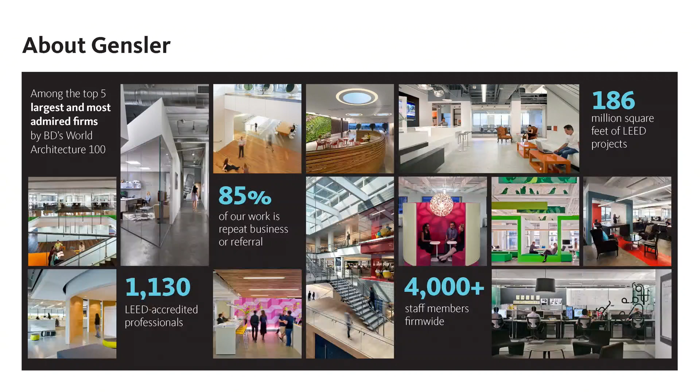But we are a large firm. We're located in a number of different cities, and we focus the work around what we call our three basic markets or sectors, and they include practice areas, which are client types. And why these are important is that they are very specific to the way that you may think of as students your programs. We were talking in one of the studios earlier about doing a retail project and a housing project, and what would it be to have a hotel, where at Gensler we actually have people that are focusing, and these are people who have built a very long career building expertise around a topic. And they add to the mix on projects to lend that credibility to not only our teams, but to the design ideas that go into them.

We're 100% employee-owned, so what it means is that everyone has a stake in the ideas that come out of the office and out of the firm. And I think this is important because it also goes back in terms of the way that we build our teams, which is very flat and very non-hierarchical, especially in LA. We are now working in 86 countries. Actually this number is incorrect because we just crested 4,000 people worldwide in the last few weeks. And we now have 46 offices worldwide.

And the reason this is important is that this allows us to do work at a totally different scale than most people can imagine. And most recently, what it's allowed us to do is to focus on this project in Shanghai. For those of you who don't know, we're working on the second tallest building in the world, which is the Shanghai Tower. If you read ArchDaily, Dezeen, Gizmodo, Engadget, any of these websites, you know that there were these two crazy Russian kids who basically climbed to the very top of this tower, hung out for a day. Yes, that was Gensler's Shanghai Tower. The way we've approached this project is that we have pulled in expertise from each of these offices worldwide and looked at the design from a number of different ways, and I wanted to share a little bit about that.

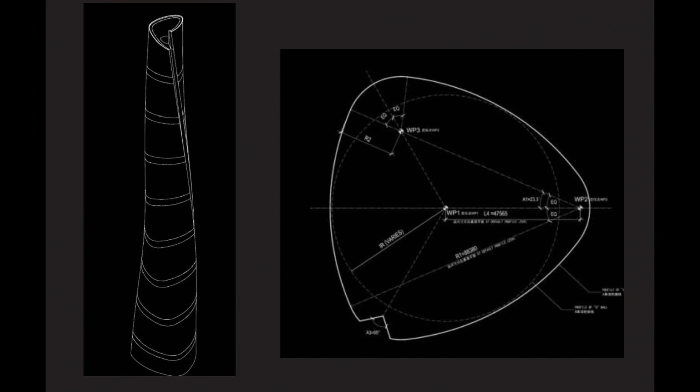So for those of you who have been to Shanghai, this is in the Pudong district. The tower is just over 600 meters tall, 632. It's a hybridized building program-wise, which is retail, office, hotel, apartment, and it will contain the highest public observation deck, unlike the Burj, in any building constructed. The way that we've gone about it is to look at it from a scripting and formal standpoint to optimize the structure around sculptural form. So what it is, let's see if I can get the, there we go. So what you get is this sort of guitar pick-like shape. As it rises vertically, it both twists and it tapers. The way that that is managed is it's done through a Grasshopper script. This is the script that builds both the form and the panelization that we ultimately exported into Revit, which I'll talk a little bit about, technically speaking, how we move from one piece of software to the next.

That form is then optimized through simulation. So what you see are varying differences of the amount of twisting that goes on. After we do that, we also talk about the amount of tapering that happens. Each one of these subtle variations allows us to remove structural steel out of the total equation because the biggest load on supertalls is wind load. So the more we can make it aerodynamic and the more that we can allow it to basically act as a fin and a blade inside of the air tunnels, the more steel we can pull out of it. Less steel, less cost, and ultimately more likely to get built.

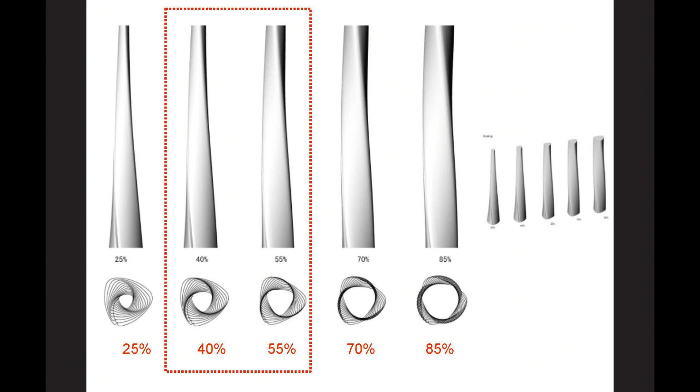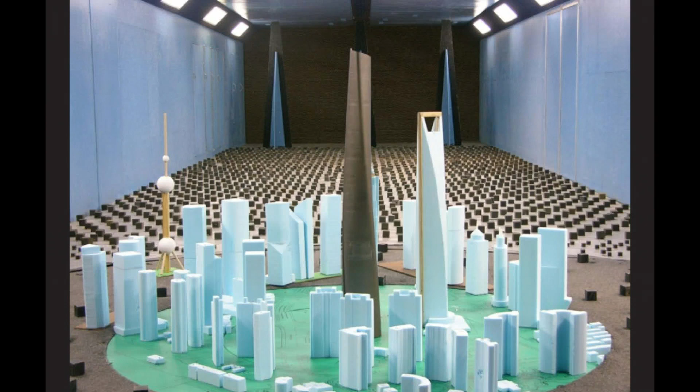So here are the wind tunnel tests. These are actually simulations. We also do them physically so that we're coming back and forth from the simulations, modifying the model. Those models then get produced into a wind tunnel. That tower that's there in the middle, which is our tower here, is about a 20-foot tall model. You can see all the wind points that are out on the perimeter. So this is really leveraging global expertise. There's people from Los Angeles, San Francisco, New York, London, and Shanghai, all working on this tower through the early parts of design. As we went into documentation, a team coalesced in Shanghai, worked on the documentation, and is still working on the documentation as we wrap up the exterior enclosure and work through CA.

This is the final wind tunnel test. This verifies ultimately that the form is right, but I think you get a sense of the overall scale of some of the models. The panelization: we use a lot of scripting in our studio and across the firm as a whole. What you see on the right is a first pass at panelization to make that shape.

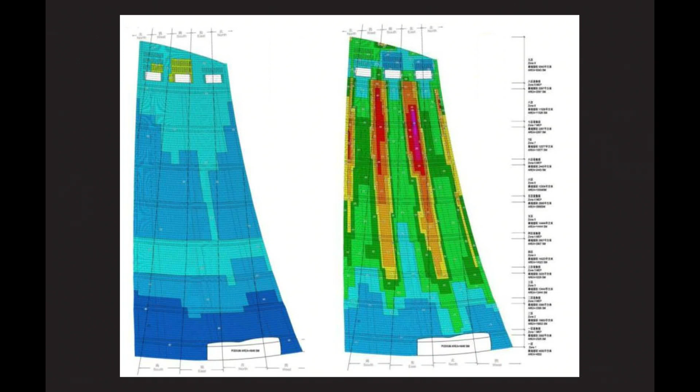What you see on the left is an optimized version, which basically allows you to take the triangulated shape or the trapezoidal shape and unitize it so that you can get a standardized shape across the entire surface. This is all done through Rhino and then exported out to Excel to verify compliance. And then it's exported into Revit. And we document ultimately everything inside of Revit.

When I was here, I actually drew stuff by hand for part of the time and drew part of it in AutoCAD. But we primarily model early on in Rhino and then document everything in Revit, and there's a really clear symbiotic relationship between the two, which I'll get into in a little bit more detail.

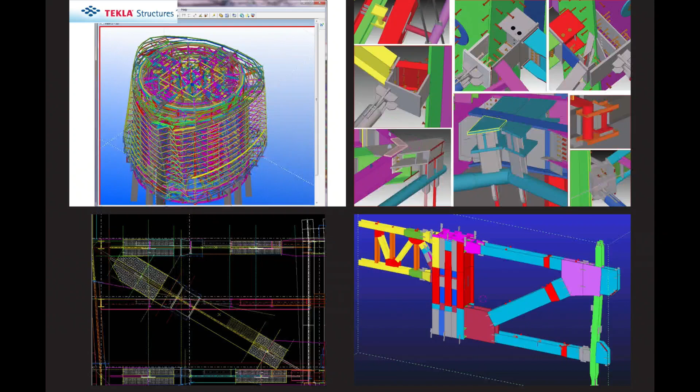We also coordinate that with our consultants, so you'll see full 3D modeling inside of the tower and inside of the projects, so they're fully coordinated models. And then we do that with structural steel as well. And the reason that the steel is so important is that in a super tall, the members are extraordinarily large, as you might imagine. So big that they need to actually be coordinated in terms of being able to be driven down the road. So you'll see the part on the left here is then put into place, and you can see that's a person right there. That's a beam.

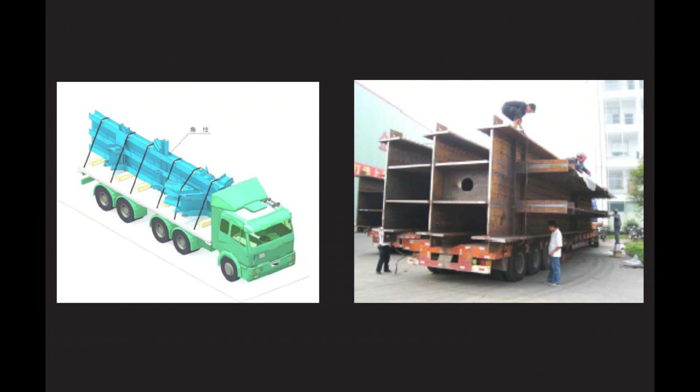And these are simulated. Again, simulations are run from the steel yard all the way to the job site, and they use our models to coordinate that activity. Just a little bit more in terms of the logistics. The way that ultimately the contractor won this project, I think, is really interesting. They were able to take our model out of Rhino and ultimately run simulation on it for tower cranes.

For any of you who have ever seen a tall tower go up, there's ultimately a crane at the very top that picks everything, pulls it up to the top, and keeps going. They won because they had figured out how they could ultimately get 4 tower cranes on top of the tower. All 3 losing teams could only get 3.

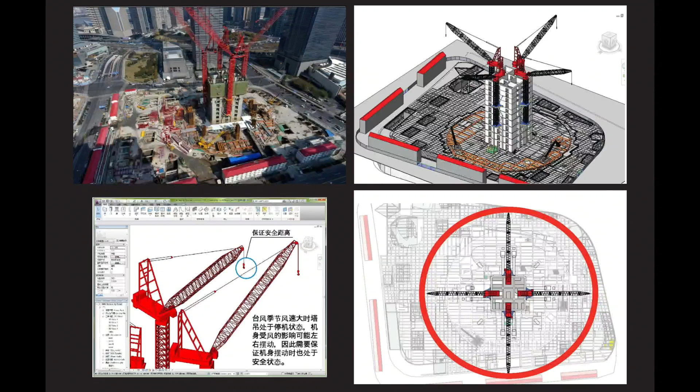And then we take that same piece and we work through SolidWorks, and in this case, Inventor with the subcontractor to go through mullion and extrusion fabrication, and then these are the shop panels that occur. And this is it under construction, and this is just a little old. We actually have a bit of an issue sometimes getting updated images out of China. I sometimes find images more quickly on Flickr than I do within our own office.

But we're structurally all the way to the top, which is here. When the building's completed, it'll be the world's largest double-skin facade. Each one of these waistbands is effectively a mechanical core that supports a stack of a building here. In the event that there's a fire, people are able to egress down to these. It's part of the Chinese building code.

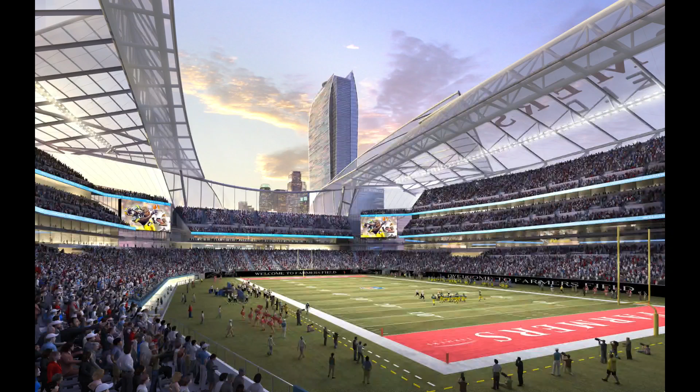This is probably no more evident than the work that we've been doing on the Farmers Field. This is a new NFL stadium in Los Angeles. We don't have an NFL team yet, but I know that it's coming soon, hopefully. But I want to just talk a little bit about the way that this roof is made. So this is Farmers Field. It's a pretty simple structural problem.

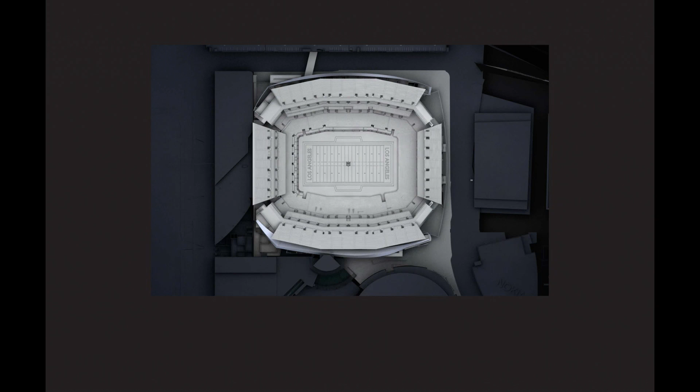Basically, there's no columns anywhere over the field, so you have these two long spans on either side. They need to ultimately bridge from end to end. There's also the piece that goes at the very edge of the bowl, which is the green piece. At the end of the day, those are two very long super trusses. Those super trusses then have a fabric piece that comes across and a piece that runs along Chick Hearn Drive.

We saw this changing over and over as we were reconfiguring the bowl design, and so the amount of structural steel that was in this, again, needed to be optimized. So we ended up writing another script for this. This script ultimately controls the structural language of just the frame, the superstructure of the lid for the stadium. And what it generates is ultimately this right here.

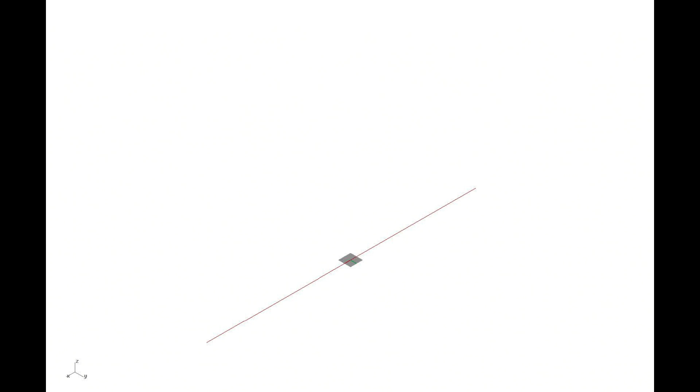And I say that because while it goes so fast when you just run it through the slides like that, it never goes that fast when it's like, I need to move this column out 3 feet. What's the implication of all of that? And so without scripting and without being able to make those larger changes, I think we would be in a totally different state, but we're able to now do that in a fairly aggressive way and then export that material back out into Revit. So it generates geometry. Those geometries are used for renderings, and this shows you a final image of the way that kind of structural piece works.

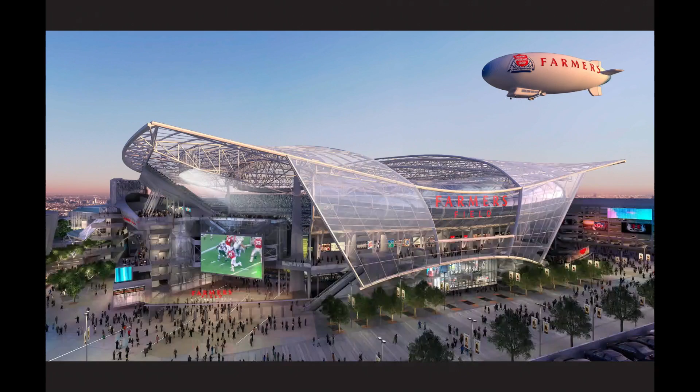I'm going to go a little bit different scale. So this is going all the way down to a memorial that we worked on for LAPD. This also talks a little bit about our own process in terms of the way that we approach the design process as a whole. So this is the new LAPD headquarters. On the other side is Thom Mayne's Caltrans building. Our memorial is right here.

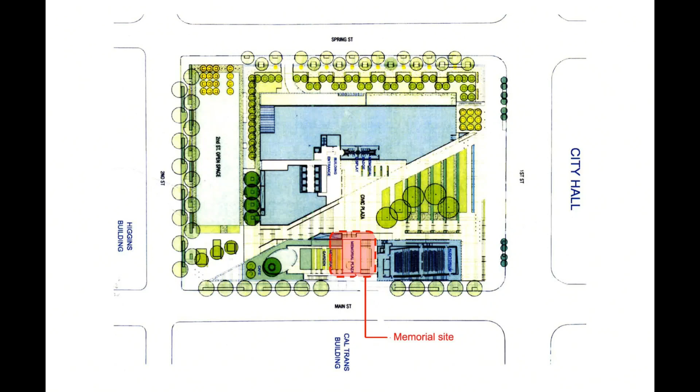We opened this up to the studio as a whole. I mentioned this idea about best idea wins. It's really getting all the ideas out and expressed, taking those, assembling them into big buckets. So in this case, there's 4 different major themes. Teams coalesce around different ideas, and then understanding what the actual program and site condition is.

So in this case, this is a very public space. This is a very private space. The LAPD had very significant concerns that there were no points where people could hide behind this thing, and it needed to be an evolving piece, something that would represent and be a living document of the service that the LAPD offers the community.

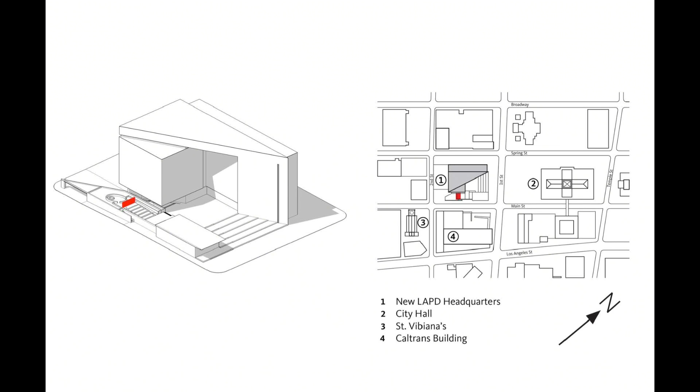So the condition here is that the garden is the privatized space, the memorial is the public one, and there's this demarcation piece that really divides the 2 pieces. You can see Thom's project on the left here, and the landscape piece, which was already in place before we started.

We just knew that this was our site. The approach that we took was this idea about kind of memorial typologies that had changed over time, the notion of stacking, and then the idea that brass has a very important relationship in terms of the police force in almost any community, and what the nameplate represents in terms of the identity of a fallen officer.

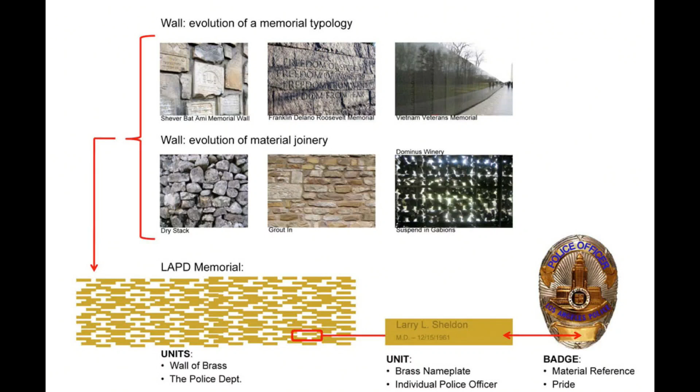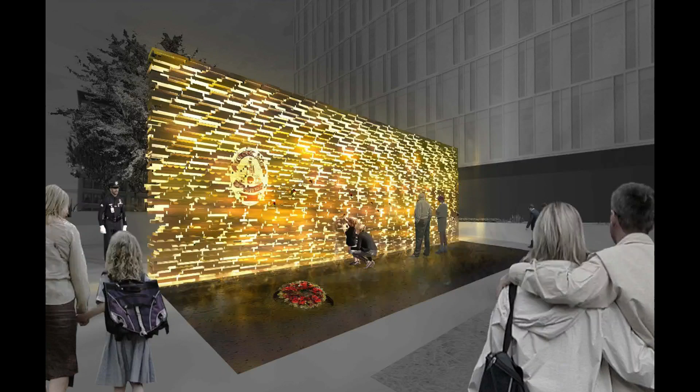This was the concept model that we showed to LAPD, a lot of physical models. This is very simple, but the notion of brass very much resonated with them. This was the concept image that we proposed. Each one of the plates is, again, scripted and managed so that we're able to ultimately not only water jet cut portions of the logo, but we're also able to put names in.

We worked with Zahner on this. We exported our Rhino model directly to them for fabrication. This is a really cool story being in the Midwest and telling this because they actually fabricated in Kansas City, put the whole thing together in one piece, took their picture with it. Then the Kansas City Police Department gave it an escort all the way to the state line.

And then when it was received in LA County, the LAPD did the same, received it, brought it all the way into site, picked it, and hung it as one big object into place all at one time. It really, for me, underscores the scale difference that we're dealing with in the studio, which is that we are jumping from very large scale, very big, complex problems in buildings to a very small object, memorial type resolution. And that kind of scale jump, I think, is what keeps things exciting.

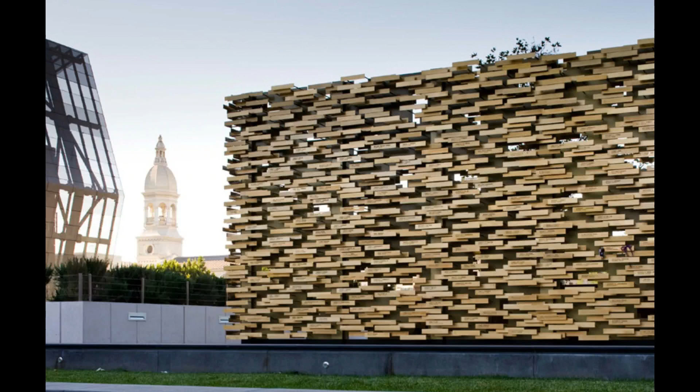So the next project I want to talk about is actually an academic partnership. Myself and one of my colleagues do a number of these academic partnerships, in this case with Cal Poly San Luis Obispo, both around material and also city and urban issues. In this case, it's the material studio. So right before we were moving in, we took on this idea of having a communal table in our office. I had 3 students from the digital fabrication lab at Cal Poly San Luis Obispo selected for this studio.

We gave them a program that we just needed to basically have something that we could put printed material out on, be able to have it as a receiving table for people who came, and then we were going to be using solid surfacing material. So these are the 3 students. These are their 3 individual ideas. What we did is we took each one of their ideas and reviewed them via GoToMeeting. So this is a completely virtualized studio.

They were in Cal Poly San Luis Obispo. I was in Los Angeles. I brought on a senior designer, and we would give them basically desk reviews via GoToMeeting twice a week. For their mid-review, they ultimately sent us a 3DM file. We took that, ran it through our 3D printer, and on the fly basically had their 3D print on GoToMeeting video and reviewed their design while they were in San Luis Obispo.

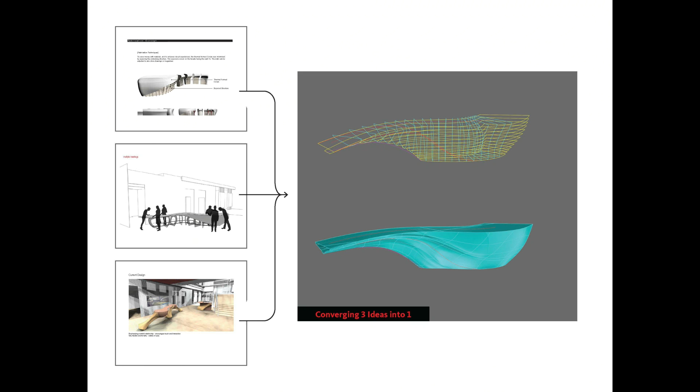For us, as a global practice, that's a very familiar and common thing. For them as students, I think it was a pretty extraordinary thing because they were not used to presenting off a GoToMeeting. But we ultimately took their 3 ideas, combined them into one, worked with Buro Happold, who we have a really great relationship with, and Greg Otto, who is involved there and who is also an undergrad K-State graduate, helped us work on the structural underpinnings for this.

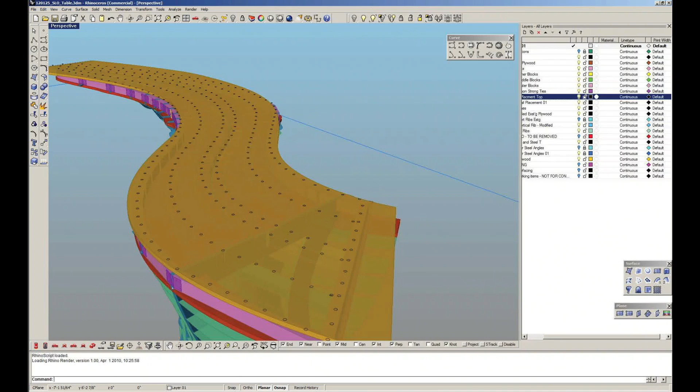So what you see is a plywood underbelly. The top basically works as a large diaphragm. There's a continuous nail rib that goes down the top of each one of these pieces. There is one piece of steel that runs down through the middle. It's a pretty ambitious cantilever because it's actually in the shape of an S. The egg crate is loose fit, which means it's not glued. And then every single piece was then sent to the fabricator as a file of fabrication model.

So this is full-size waffling. This is Baltic birch plywood. The pieces were cut in halves, assembled upside down, pushed together. Ultimately, you see the strap that is running down the length of the top and the steel that is ultimately encased in wood as it goes down through the middle.

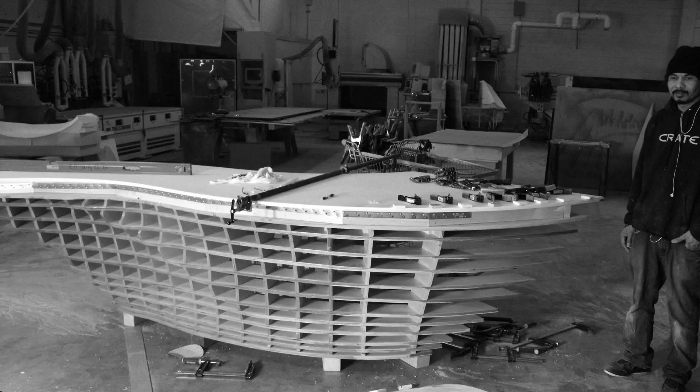At the same time this was happening, we took solid surfacing and started to form it. We created a partnership with LG Hausys in this project, and they loaned us material engineers and material scientists that knew their material backwards and forward. They gave us the documented limits of materials and then said, this is where we tell everybody you can't go, and this is where we know is actually failure.

And the brief to the students was, you have to operate in this zone. If you operate below what's documented, we haven't gone far enough, and if you operate above the point where they're telling you it's failure, we are going to break stuff. So you have to operate in there.

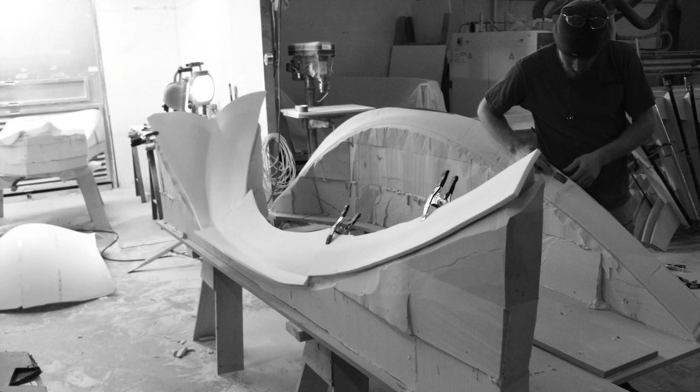So these are the forms. This is high-density foam that's milled out. You start seeing clamp molds to ultimately wield the solid surfacing into material. Once you do individual panels, you then thermally weld them one next to each other. Those are hand fused together, welded, and then held into place.

They're ultimately put onto the table, hand buffed out after the thermal welding occurs, and then it was created as one big 18-foot long table and brought into our office, which you can see down here, maybe at the very bottom, but this is the final result.

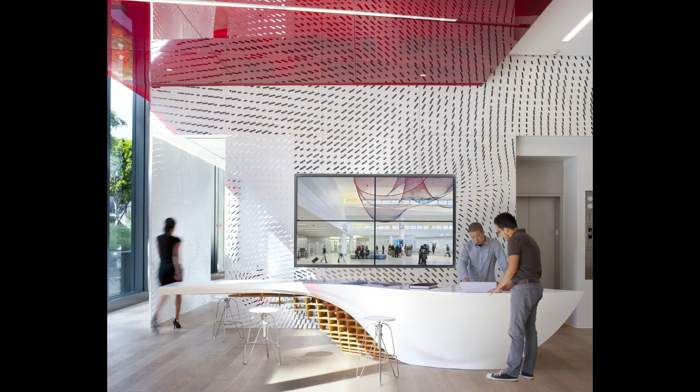This is just an example of what I think has been a really great success over the last few years of our office getting really tightly involved with academia and not looking at relationships as something where we are just merely contributing either financially or just our time, but this is where there's a symbiotic relationship of us basically being able to make things happen, students learning, and a manufacturer donating materials to allow things like this to go on. It's a total win-win for everybody.

So the next project I want to talk about is Santa Monica College. This is a project that is currently just wrapping up permit review, and I want to talk about the cladding that's around the outside. When we started this project, it came out of a lineage of a series of investigations around perforation. And this is a thing that goes on in the studio a lot, which is that we'll find ideas, we'll look at things, we may not be able to implement them on a project, but we basically park them and we keep them in terms of an investigation line that we can rebirth and look at in the future. And it came out of actually an exercise with my daughter.

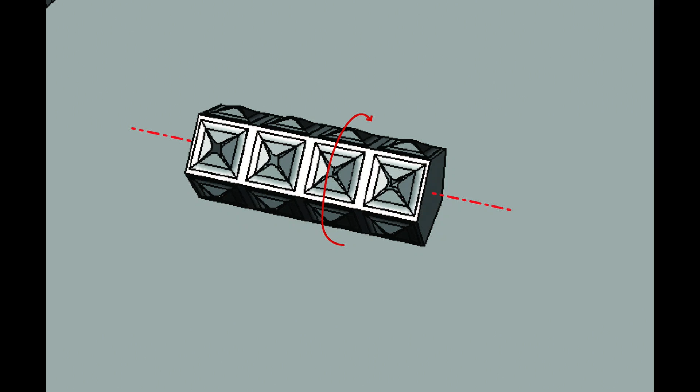My daughter was playing with a dough roller, and she was making cookies. And so the question was, she wanted to know if she could take the cookie cutters and put them on the dough roller. And it made me think, like, why couldn't you do that with perforation? And then it started making me think, well, why could you do it and not just perforate it, but actually have zero waste and actually tab and perf?

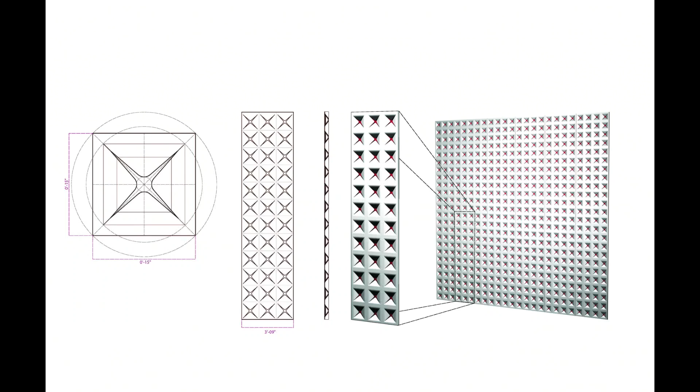So this was the original kind of modeling that we did. It results in physical models. So these are one of about 50 studies on texture and form. We reached out to Zahner. The idea was that maybe we could do this out of metal. You know, this was the one that we were ultimately really becoming enamored with at the time.

Zahner was telling us that when you roll something over like this in one direction, to tab this and to tab that in two different directions is pretty easy, but to do this one was really, really hard. So we got a price, and it was astronomical for this project, but it was an evolution from what we had looked at prior, so we shelved it. But we had already kind of pitched this idea to the client, so we were really on the hook, actually, to be quite fair. So we had to come up with a way to take this kind of idea and implement it, because they were under the impression that we actually knew what we were doing.

So we started showing pictures like this to them, and the idea was that if we could use another material, in this case FRP, which is fiberglass material, we could not only cut the holes, but with fiberglass we could actually do something else, which is we could form it. And when we would form it as an S-curve, it actually would give it strength.

If you've ever looked at the way the curtain wall works, if you span curtain wall from one floor to the next, all the load is right there in the middle. What it means is the steel that goes vertical has to be extra thick. But if you make this 2 floors high, the load's still in the middle, there's a floor right behind it. It means that the floor is actually picking up some of the load, the wind load, and it allows you to thin things up. And so what we thought about was like, let's make the FRP have that same S-curve. That'll give us strength and stability.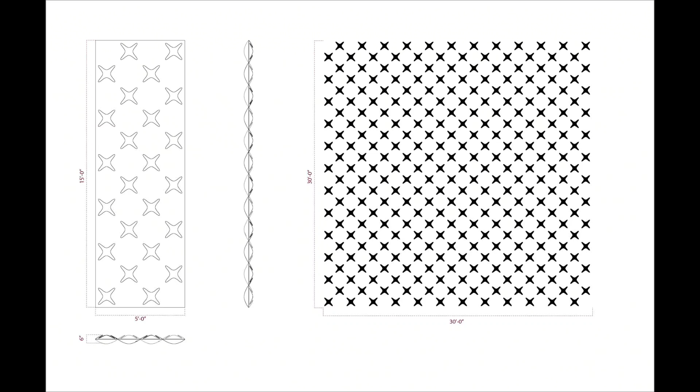And then the forming of that out of FRP is where a lot of the cost is. The real economy is in the perforation. So if we water jet cut as opposed to form it, which was what the original idea was, what we could do is we could have a fairly high amount of variation. So what we would do is we would form the panel as a whole. It'd be a panel that could be repeated. And then the X's would be water jet cut, going from very small to very large. It meant that the economy was in the forming and the perforation at the same time. And we ultimately built a script to deal with that sort of Xing.

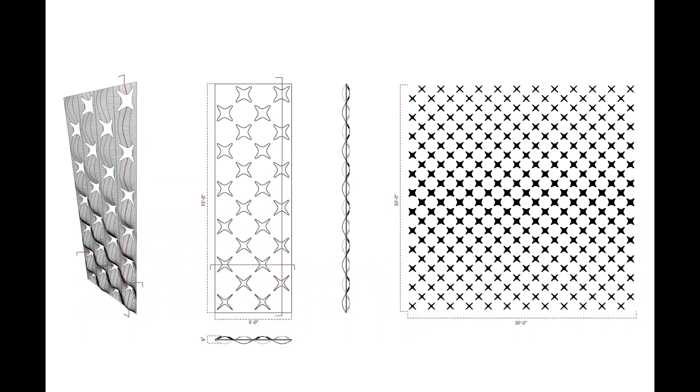This talks about the geometry of the ovals, how the X's are formed. Once we have those X's, we can then build a set of panels that go from bottom to top. These panels are built in Rhino. They do sit inside of a Revit model, which I'll show you, but this is ultimately the 30-foot tall span. This gives you a sense of the sort of gradation that you begin to see and the amount of topography with the isocurve lines there on the left. This is the paneling as it wraps that portion of the building. And then these are the prototypes. So this prototype is about 8 inches tall, 3D printed.

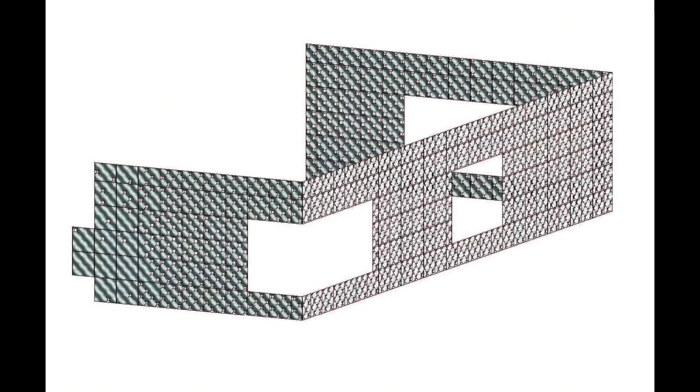We were having already sort of budget issues before we had started this, and so we needed to be fairly economical. So what you see there is basically Sarnafil roofing material. If you use Sarnafil roofing material in a quantity that's larger than 5,000 square feet, you can actually have it Pantone matched. So we used a red that was color-coded based on a northern exposure that allows us to get this amount of pop out of it. So what you see is basically exposed roofing material with a white FRP skin as effectively a brise-soleil.

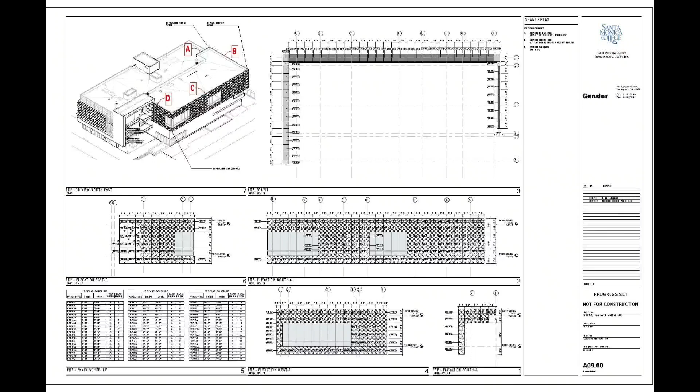We take those panels, they get put into the Revit model as a curtain wall family. They're cataloged. This allows us to communicate with the fabricator exactly how each one of these panels are made. We also share these from a fabrication point of view in terms of the way that they're produced. Each one is able to be cataloged, and those are sequenced in terms of a large sheet here, which talk about overall shape and size, also the amount of perforation and where it's located on the building. And then the bottom is a series of solid ones without X's. Instead, it has a series of weep holes at each one of the valleys.

Once we had the buy-in from the client who now knew that we actually knew what we were talking about, we had an FRP mock-up made, which is a one-to-one mock-up. So the size of this is actually 15 feet tall by 5 feet wide. The in and out, meaning the height from the valley to the ridge, is 6 inches. It's a 4-inch off-center separation. And then each one of these X's is water jet cut after the panels are made. And this is the documentation that's in the CD set.

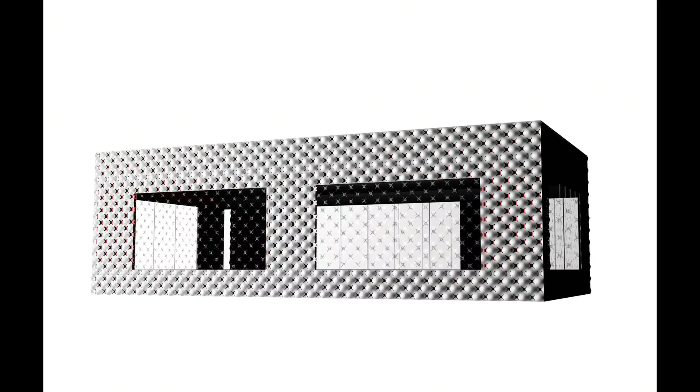The other part of this is that there's a series of glass curtain walls next to it. And we had an issue because this was actually part of a dance studio. There were privacy concerns about people being able to look inside of each one of the dance studios, and so we needed to come up with some notion of a scrim. There was a very early idea of actually running that FRP past and gel coating both sides. Cost-wise it did not work, so we ended up dealing with a frit pattern.

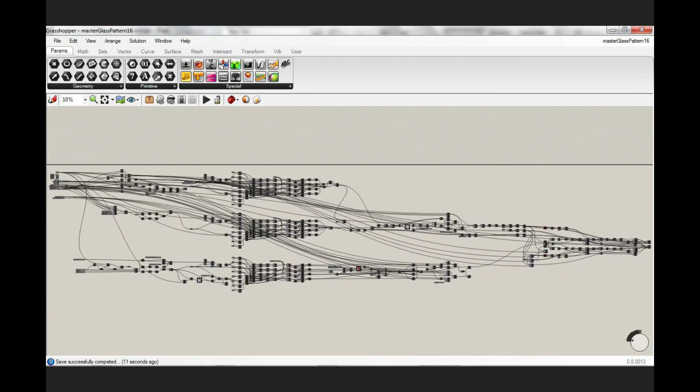So what we ended up doing is taking the X's that we had developed from the perforation that already had their own kind of logic, and then creating a system that basically would allow it to gradiate based on its proximity. So around each one of these is basically another series of X's that combine. The farther you get away from them, they shrink, and what you get is an effect where you have very small X's that combine, and then you start to get O's. The bottom portion of this building is, by the way, the football team, so there's this whole kind of XO parity between trying to make the dance folks happy and the football players still feel like they're football players.

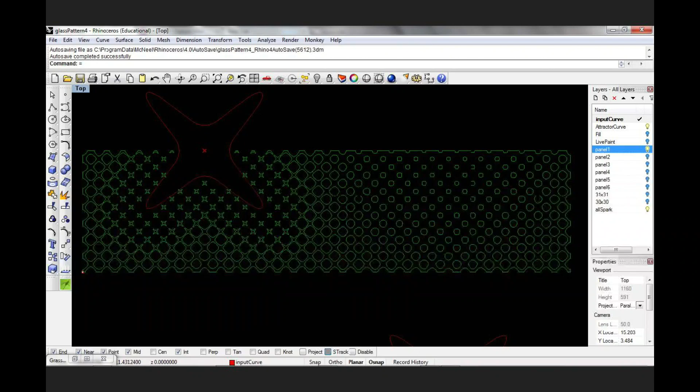So you get a perforation or a frit pattern that starts to have a quality of this, and then it has proximity based on the other ones. So you start to get very high levels of concentration, which in fact relate to the way that topography works in the FRP paneling. And you get results that look like this. This is 30 inches by 30 inches tall.

You then combine that all the way up using the same perforation. Again, these are all able to be tailored out and back and forth using Grasshopper, so you'll see density qualities change here. And then we take a piece of plexiglass and we basically look at each one of these patterns individually. The client liked these so much that we ended up having them printed and framed for them as art pieces. So there's a number of these studies that are actually framed.

But what we took ultimately in our own shop was pieces of plexiglass and laser etched them. This is a laser cutter running for about 26 hours each panel. I don't know if you've ever smelled the fumes off of a laser cutter running for 26 hours, but it's not positive. But it's a pretty amazing effect. So these are the close-up images of the scored pieces.

And we started looking at overlays. We also started looking at what the effect was from a distance. So you start to see the shadowing effect here, kind of a resolution issue on that side, but you can see the effect on the inside. And then as you get closer, what the quality is.

So I want to jump back to a different scale, and this is going to be a series of projects that all have a relationship to one another, and it comes back to a project that we're working on right now with UCLA City Lab, which is our research partner on a future of office work, which is something that I've been involved in a lot in the last year. And I think it comes down to being part of an office that moved from the west side of Los Angeles, very close to the beach. We're now in downtown.

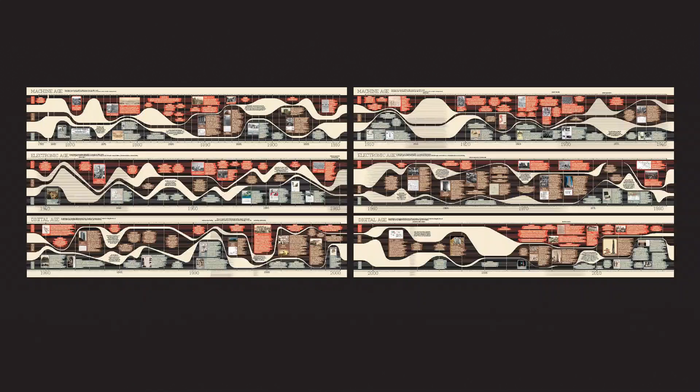And these series of timelines. This looks at, in red is the influence of the city, the brown is the building, and the desk over basically the 20th century. It's major advancements between each one of these different disciplines or factors over time, and major ages. So what you'll see is in downtown Los Angeles between 1870 and 1890, there's an enormous amount of growth. It's remarkable to think that this can happen only when you go to Shanghai or Beijing and see this exact same thing happening right now.

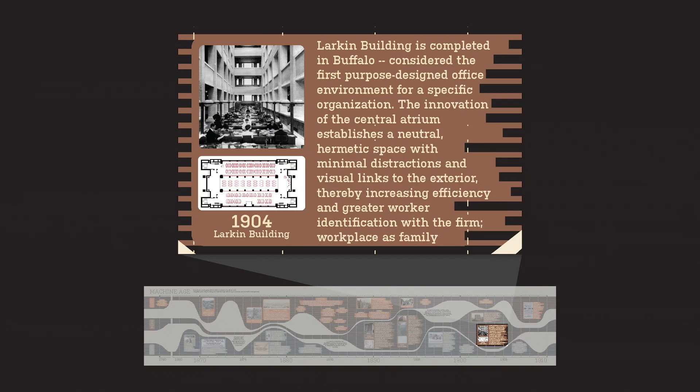But by the earliest part of the 20th century, the office building was establishing its presence. It was beginning to figure out the models of efficiency based on standard planning. This really comes out of models of manufacturing. This also lends itself to the lineage of Gensler in terms of the history and topic. By the 1930s, there's standardization in office furniture. This begins to correlate with the GSA, the General Services Administration, starting to look at office planning standards. And by 1939, you have Frank Lloyd Wright's Johnson Wax building, which is arguably the real first image of unified corporate culture, the one big work floor.

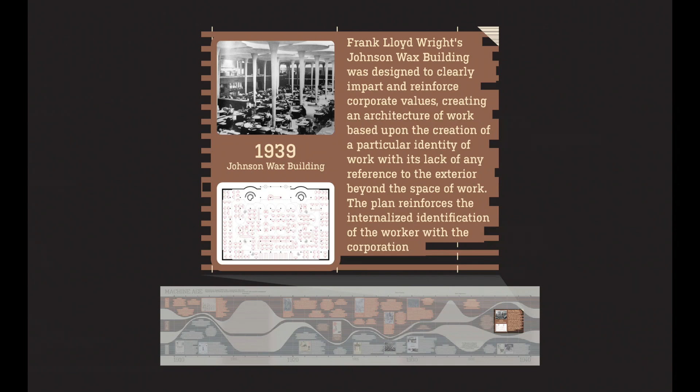Why this is important is that by '65, the tax code changes that I mentioned really start to force a totally different logic of office buildings. And for Gensler, that just so happened to coincide with when Art Gensler founded the firm. It's probably no accident that this also birthed basically the beginning of corporate interiors, which is where Gensler obviously got its start.

But for me, most significantly, in the mid-70s you start to see mobility come online as topics that people are talking about, with the Digilog briefcase portable. I can't imagine carrying that thing. And then by 2000, you have the promise of the internet and what it could potentially do in terms of mobility and kind of a nomadic workforce.

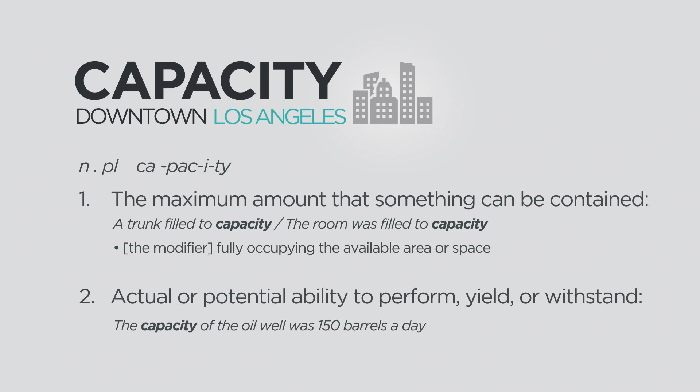So this brings me to the issues of cities. We started a studio about 1.5 years ago called Capacity, and it was really interested in how cities evolve, how cities densify, especially in North America, and specifically in Los Angeles. What we were really interested in is understanding what was the capacity of downtown Los Angeles to grow, to really densify.

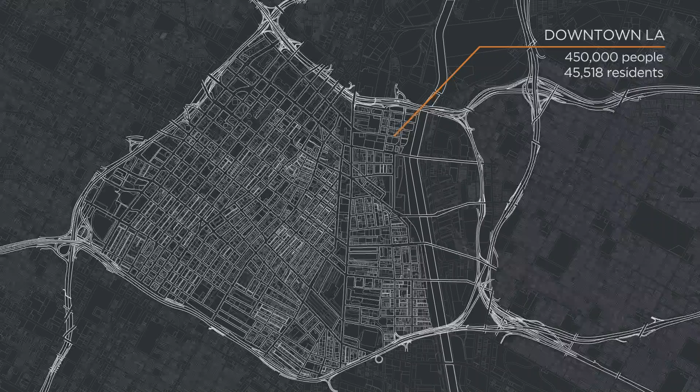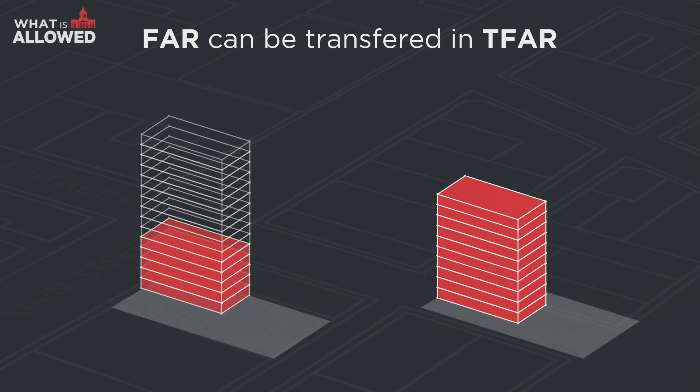Probably one of the main governing factors of building in North America and in most municipalities is FAR. FAR dictates the floor area ratio for a given site. If you have 5:1, you can do maximum 5 floors. Half of that would be 10 floors. You build on a quarter of the site, you can do 20. In LA, there's a thing called TFAR: if you have an existing building that is not utilizing all the FAR, you can make some money and transfer that to somebody else and build something even taller on top of theirs through entitlements.

These are the FAR zones that exist in downtown Los Angeles now. This has historically been the industrial area of downtown. This is the Alameda corridor and the LA River. There are the train tracks along this side. The red area is the historic financial core, and this area is where Farmers Field and LA Live, which is a large tower that Gensler completed.

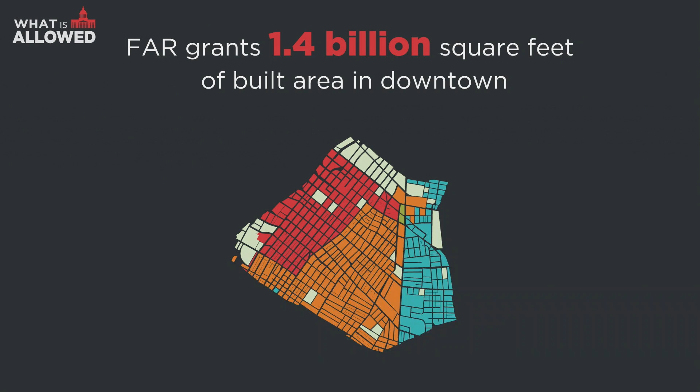The rest of this is sort of the warehouse district, and you can see the difference between all of these. So FAR, if you took all the FAR that was available in downtown Los Angeles, it's basically 1.4 billion square feet. And to give you context, there's only 10 billion square feet of office space in all of the United States. So this is a pretty astonishing number.

It's 360 Burj Khalifas, which is the tallest building in the world. I probably should use the Shanghai Tower for this, but let's focus on the world's tallest building. And to look at that, that's nearly 4.3 million people, which is the whole area that LA City, that larger brown area that I showed you before. It's an extraordinary number when you compare there's only 450,000 people downtown.

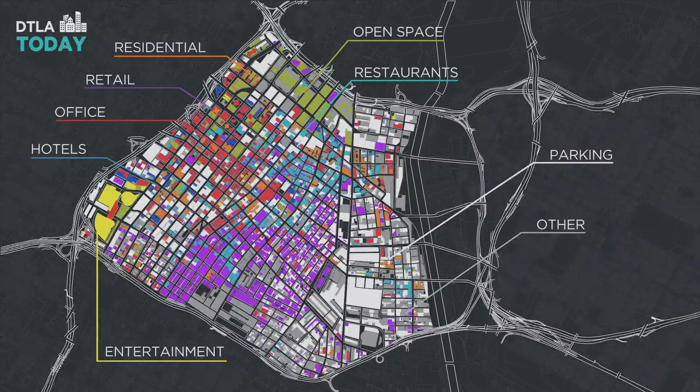So clearly something is off with FAR in terms of it being a limiting factor, so we wanted to focus on resources. We looked at primary uses all across downtown, hotels, offices, retail, residential. Ultimately, we focused on just these that are highlighted as 3 primary consumers of resources. And the question was, what was the resource consumption per person per day in downtown? We started with each one of those variables: water, electricity, natural gas, how much waste did they create, and what was the parking demand to fill the program requirements.

And then figure out basically, and these are all off of publicly available information and statistical pieces that is all totally open source after we do these projects, where did each one of these projects put the demand? So what you see is that hotels are very water and electricity intensive. This is probably not surprising because most people go and they leave all the lights on and they take long hot showers.

So what are the limiting factors? We started off with the existing population at 450,000. This is what the urban form looks like in LA right now. If you take that up and you just use maximum height, which is 75 feet for the bulk of Los Angeles, leave everybody in place, you can basically support 2.6 million people. If you take FAR, that's the Burj Khalifa model. That's a lot of tall buildings.

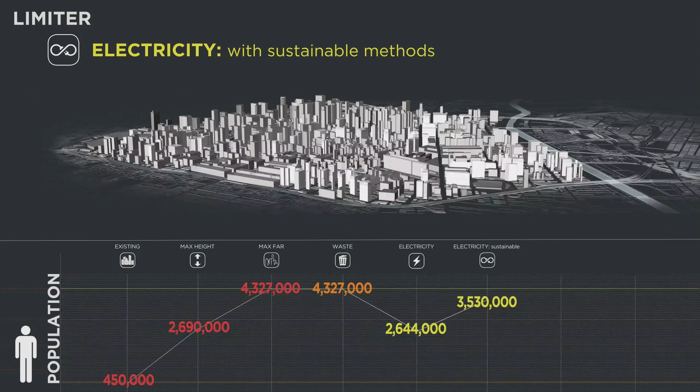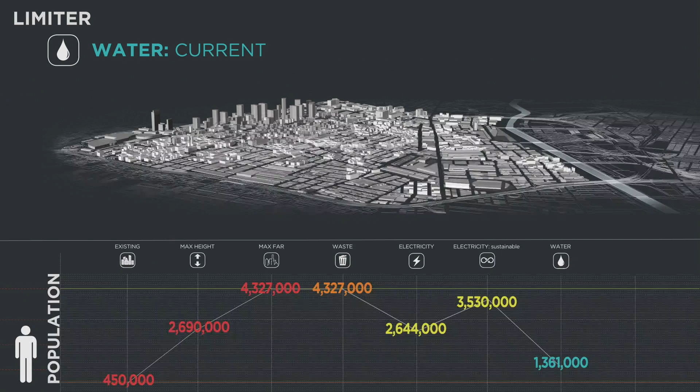The biggest thing, and not surprising, was Los Angeles is starving for water, definitely in the case of the drought right now. We import all of our water. If you live in Colorado, we own your water. It comes down the river, unfortunately, but it's a reality of living in an arid climate. So current water capacity is like 1.3 million people, which is actually not far off from where we are right here, and it really puts the demand on relooking at the way that we think about water in LA.

This gives you a sense of where our water comes from. The question was, if we recycled more of the water using different types of projects, what could we do? Right now, 99% of our potable water goes to these kind of uses.

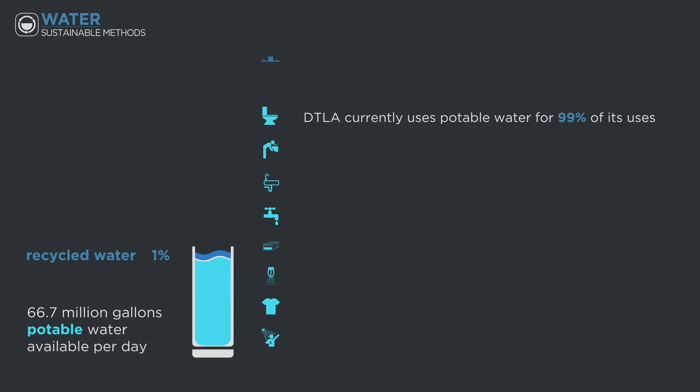It's a real shame because, quite honestly, there's a number of these things other than drinking water that you could use recycled water for. If you did use recycled water for a number of those, you could push this up to 3.5 million, and it really underscores the fact that this is all limited by water.

The work that you see here was a 10-week studio with 3 students. And I say that because this is an extraordinary amount of work and research done in that kind of time. This calculation in this chart is what we made publicly available. It gives you all the use rates in gallons per day for each one of the use types. You can also plug in percentages and overall square footages and run your own models. I heard this described as kind of Sim City for politicians once.

But the mayor of Los Angeles, we sent him the video, and we've done a number of these as videos. We sent him the video and just said, hey, you might want to check this out. And like 3 weeks later, somebody came up to me and was like, the mayor's walking around with your video on his iPhone showing it to people. And for us, that's a really great thing because it basically forces the conversation to start happening. We call these speculation projects. They basically prompt conversations that may not normally be happening.

So the aha out of this for the city planners is that FAR in downtown Los Angeles is not obtainable, but it's all about resources, and it's changed the conversation for us in Los Angeles in a lot of different ways. So next I want to talk about buildings. When we moved 3 years ago, this was the kind of space that we started seeing pop up everywhere. This is the 10 billion square feet of office space that exists all over the United States.

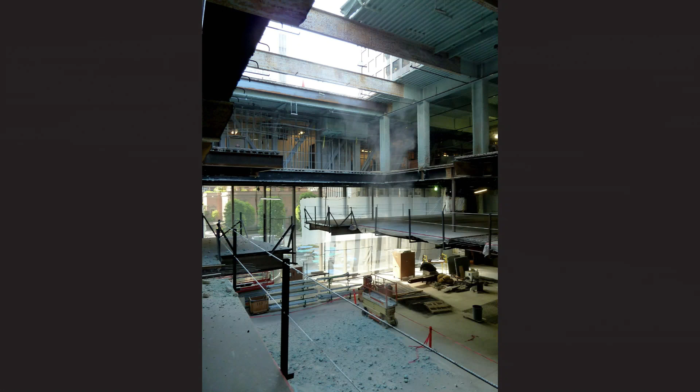So when we took over this space, it was a freestanding building in downtown Los Angeles. There's two high-rises on either side of it. We're sitting on top of two restaurants below it. We did some fairly aggressive things. We cut skylights into the ceiling. We hung a floor, which is this. We cut a hole in the floor up above, which was all archive storage. We ultimately populated this building in a very different way. This is now an office building inside of what was formerly a banking hall.

But a lot of the operational moves resulted in communal spaces, which we use for very public functions. In fact, we have this space, which is one of our primary spaces on our ground floor. We let people come and use this space like 3 or 4 times a week for their functions. It's just our way to sort of give back to the community, for our staff to be able to interact with them. And it's a great space for us to get together, like the photo I showed earlier too. And it's a pretty fun place.

I think it really ultimately grabs the way that we work, which is very collaboratively. There's a certain amount of fun that goes on, riding bikes around. And it's a very transparent culture in so many ways. It's always filled with activity, which is a great buzz to be around. And this is the most clean stage shot I think we have of the way that the studios work.

We end up having chilled sails. These are a series of water fins that are radiant cooling, cool air drops. We take as much of the lighting as we possibly can out of the ceiling, and we bury it inside of our furniture. That allows us to amortize the cost of that lighting system inside of furniture. It's a purely financial play, although I think the design result is quite nice. And it expresses all this activity very much to the city.

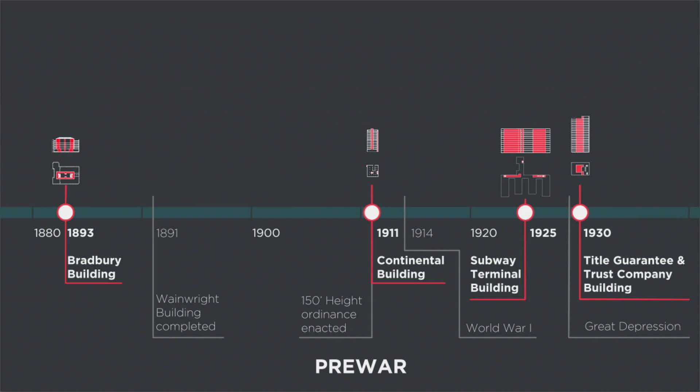We looked at 12 buildings in downtown Los Angeles from 3 different eras: 4 from pre-war, 4 from the time between World War II and the 1970s. This is when mechanical ventilation and vertical transportation start to come online. And then the 1990s, where the basic floor plate of office buildings stagnated, and basically the model was, from a cost point of view, just repeat it as tall as you can to get a lot of economy out of it. You can see the timeline: very small buildings, very tall buildings.

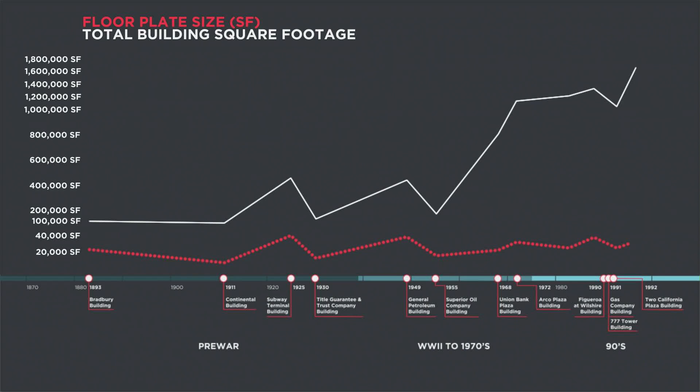And the reason we asked that question was not just because we were being asked for it for a competition, it was because there was something happening. We were building a lot of stuff, and we still are in Asia, and that's because the supply there is very low and the demand is very high. In North America, we have very large supply, and we have very low demand.

There are 3 basic drivers in what's happening here. The first one is mobility, that whole nomadic culture, everyone carrying an iPhone, an iPad, and a laptop. And then also issues of sustainability and speed to market, which is how quickly you can do things. Because everything that was once static is now mobile. You've put everybody into motion. Technology has totally transformed the office space. Once you do this, the largest disturbance to permanent office buildings is mobility, because it really forces you to rethink a number of

It's like an egg timer. That's. Let me. If we get this up, I may just skip a few renderings.

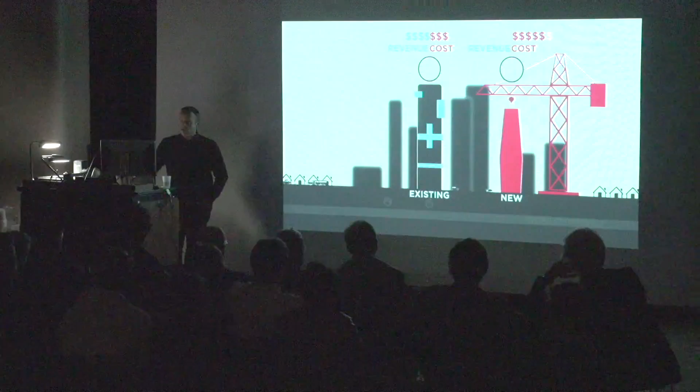So to do this and to really capitalize on speed to market, the notion was that basically you would take on a series of these small intervention projects. They could generate revenue fairly quickly. The cost could be pretty compartmentalized. They could be done over time as opposed to the real effort it takes to build a brand new building and the capital investment to pull that off.

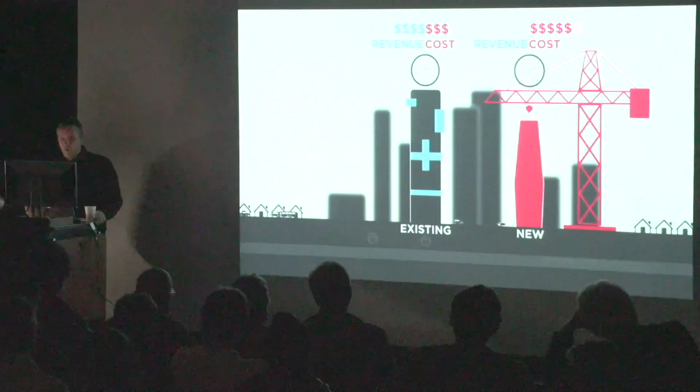So there was a series of pioneering interventions that was put out. It's related to cost and effort of implementation, from really easy things like just changing the use to getting more aggressive, where you're starting to put structural and operational changes inside the building. The most aggressive thing was we were going to run a transit stop underneath an existing building, which was astronomical. But it's things that we had seen and done in our own space, penetrating floors, removing floors.

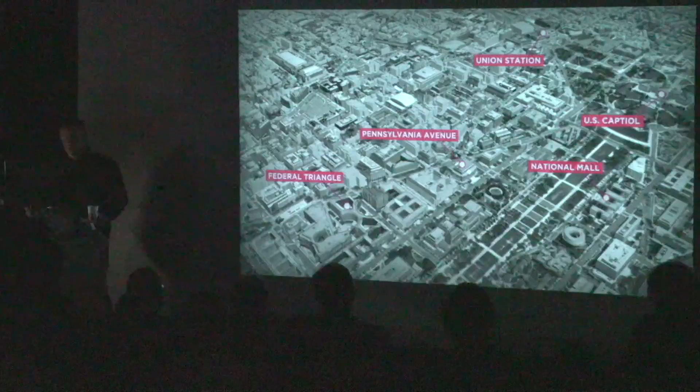Hey, why not even make a floor movable in some way? Adding skylights, adding interfloor elevatoring, connecting and harvesting rainwater. This started to interrelate to the capacity study and bring in natural light. So we applied this idea to two projects, one in DC and one in LA. What you'll see first is a project in DC. It's the J. Edgar Hoover building. It's a humongous building. It's 2 million square feet.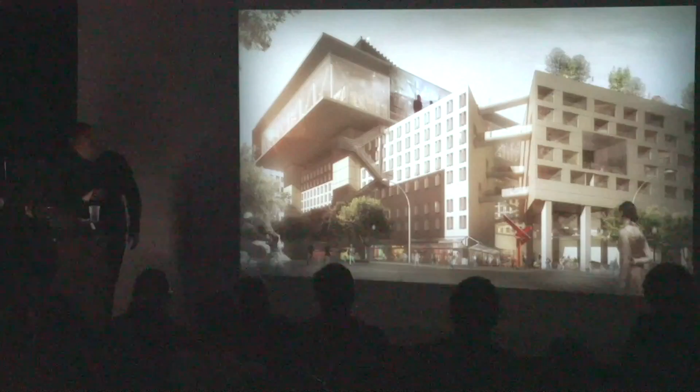And you can see I would not want to sit at the very end of that watching my kid play soccer. But you can see from this the views back to the Capitol at the very end, and then the soccer field at the top. We did the same thing with a project in LA as well.

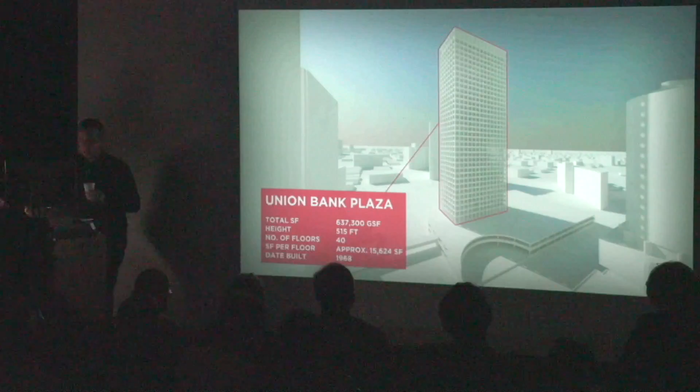This is a tall building. This is the Union Bank building in downtown LA. It's 40 floors of, for the most part, the exact same floor plate. So the idea was much more of a sectional play where you start to have assembly spaces near the bottom and you sectionally change the building as you go up.

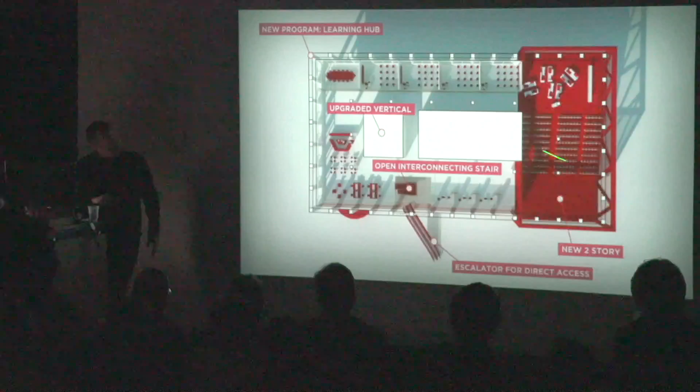It means you're putting things like, in this case, a kind of educational suite, amphitheater, we'll call this the big theater, not the little theater over here. And then communal education facilities, things that have very high assembly spaces. And then you stack vertically things like standard classrooms, fitness centers.

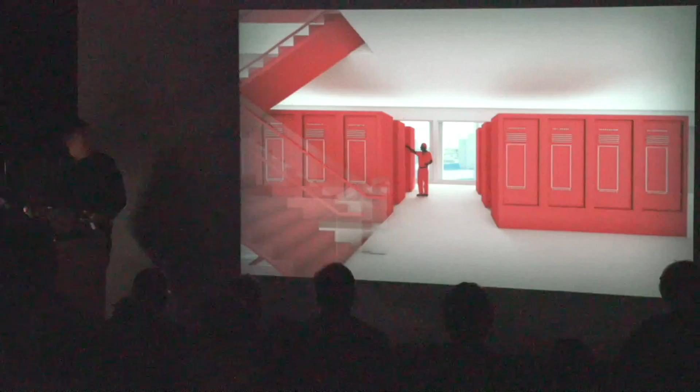You shove data centers in spaces that are really hard to lease because data centers, the positive out of there is that they will continue to grow. We see this all over North America and all over Europe. But the positive out of this is they produce a lot of hot water. Hot water is great for hotels. We just learned that in the capacity study. You can also run residential uses off of hot water uses. Maybe there's even a spa.

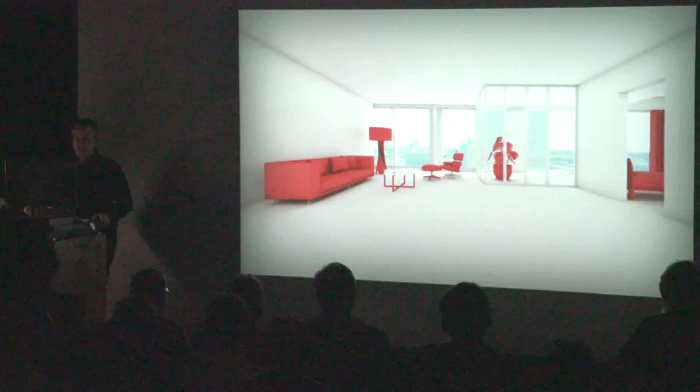There's traditional office, and you get farther up and you start to get more aggressive with the moves where they start to manifest themselves on the outside of the building. And brands no longer are confined to sort of this homogeneous exterior, but instead they start to express themselves on the outside. The other thing is that you get this kind of layering that becomes very poly-programmed from the outside as well.

And the notion was that if you take this principle, sort of look at it from a city point of view, do it with one project, you implement even something that allows this to happen over time, it becomes very iterative, and the city as a whole sort of takes on this kind of adaptive quality.

So the last project I want to show is more focused on workspace, and it's a project for C3, and we were asked after we won that competition with the Hackable building concept, do that with a new building. And it was like, but you're supposed to do it with an existing building. And they're like, but yeah, we want you to do it in a new building.

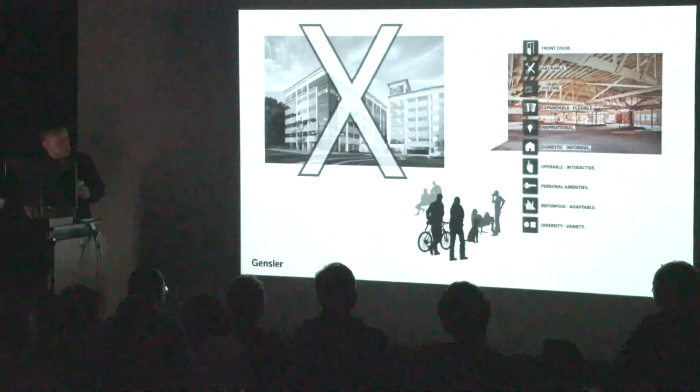So we took a lot of the same premise, the ideas we were being asked to look at for a lot of existing space in LA, which looks like these bowstring truss buildings. And we came up with this idea of C3. And this project is actually moving forward. It just went through entitlements, so it's actively moving very quickly forward.

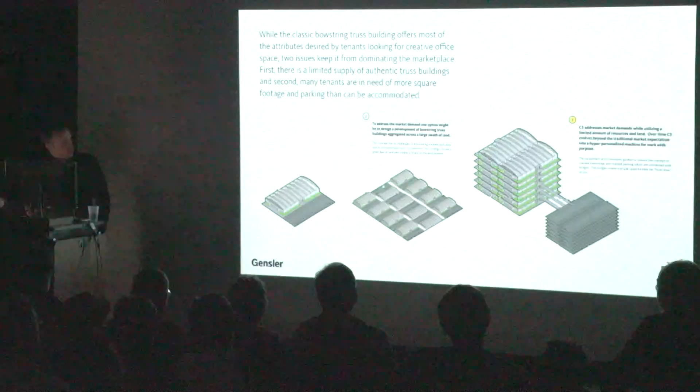The premise here is that you basically are able to take the bowstring truss building, the whole idea of a private front door and access to parking, and replicate it, as opposed to the traditional suburban office park. You take everybody's parking and you co-locate it, you take everybody's bowstring truss building and you stack it, and that's the conceptual diagram. It works pretty simply, where you have a big workhorse piece of parking, a great public space in between, and then the most efficient floor plate, which is a square with a center core in the middle.

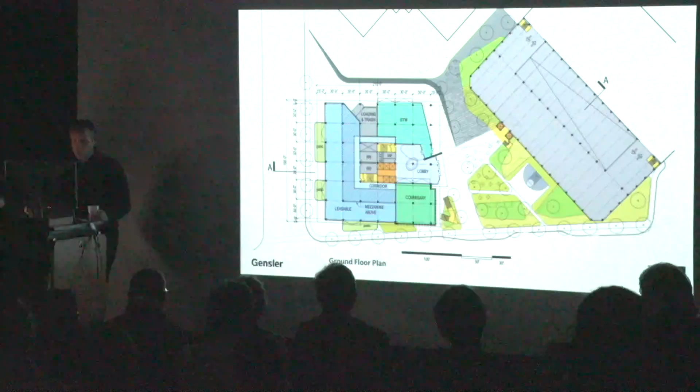The aha here is that the floor to floors vary. So these are double height floor to floors, and then single height, double heights. It allows a high level of adaptability and customization. The whole notion here is that we're able to offer up a framework building at the very beginning, and then give a suite of tools and operations to tenants that they can then invest in over time, connecting stairs, private connectors from the outside, and you get this ultra adaptable piece.

The big piece is also that, talking about FAR, the developer does not actually build to the maximum FAR on day one.

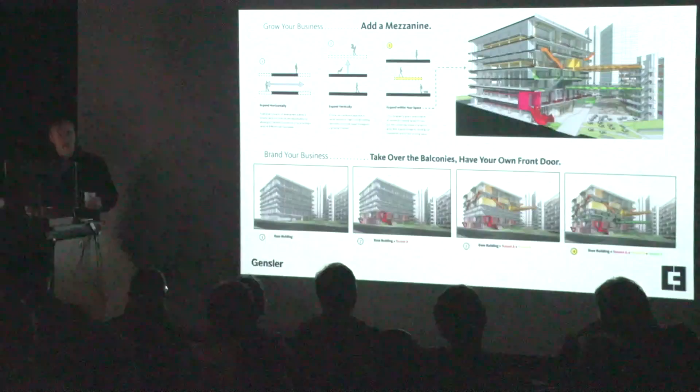Instead, what they do is you build this double height space and you let tenants hang a mezzanine in the future. The reason this is a big deal is because, and we did this in our own space, we hung that mezzanine, we don't pay rent on it, we paid for it, but if we ever leave, it becomes an asset to the building owner, and so the developers really became quite interested in this notion.

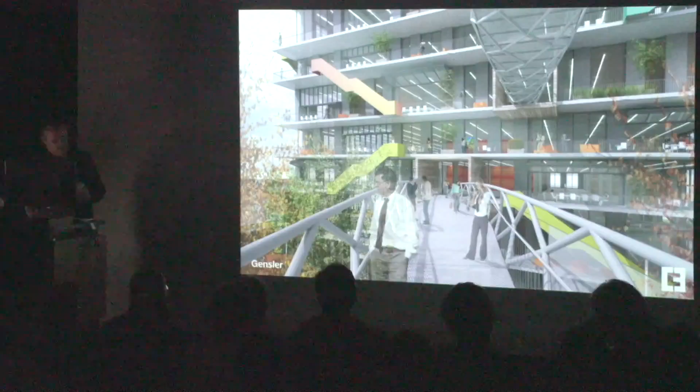This whole idea of private front doors is a really big thing. What we keep hearing from more and more clients is they don't like the idea of going into one singular elevator and going up this sort of commercial piece, getting separated from each one of the floors. Instead, they want to see activity, they want to be connected. And so that is able to occur on multiple levels, and you end up getting a result that's sort of base building and then tenant customized on the other side.

We also have fairly benign climate, and I want to thank you for giving me benign climate today. I hear you have had some pretty harsh weather, but this is pretty nice.

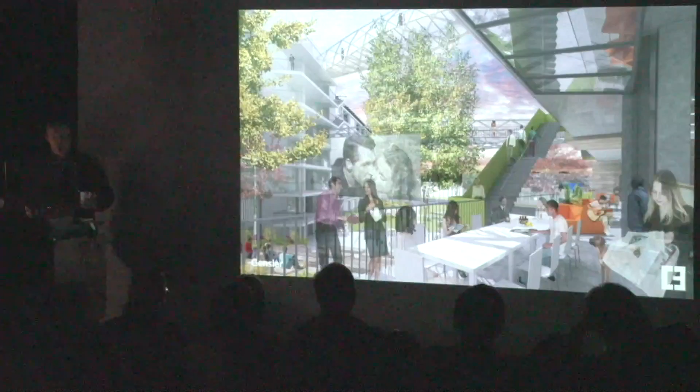But this is very much taking advantage of indoor-outdoor relationships and the whole notion of operability. So this was the space that ultimately we keep hearing from tenants they really want. And so this is the kind of space that we're offering up in that final project. So thanks.

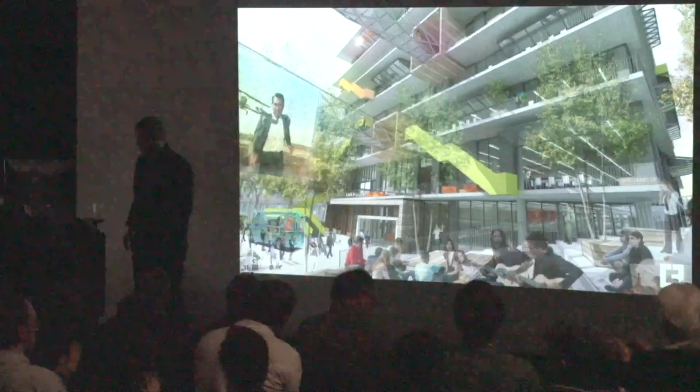Sure, my middle name's Ryan.

Sure. Are these like speculative type projects, and I think that's what Gibson's bringing up, is it something that is self-initiated, that someone within a firm wanted to study the potential future growth of Los Angeles and did that, or is it something that the city initiated?

Sure, so combination. So I initiated it, to Torgeir's question, the capacity piece. The project that's here is a developer, a client coming to us, having seen a speculation project, or a competition submittal, I should say, which was the hackable building idea. So the hackable building piece goes out, it's a competition submittal, a developer sees it, they call us, say, we really like that concept, let's go over here and do a real project. And there's a number of those examples.

I mean, the table is a really good example. So that table is in our front lobby. We've had a number of clients say, I want to do a table like this. Let's do something different. And so they become in some ways part of the lineage of investigation. It's like the perforation studies, but they are sparked. A lot of the studies are sparked internally.

I will just say we very rarely have clients who come and say, hey, I want you to study perforation, or I want you to study whatever it is. You have to layer that on the work. And for me in my studio, it becomes really important to have lineage and continuity.